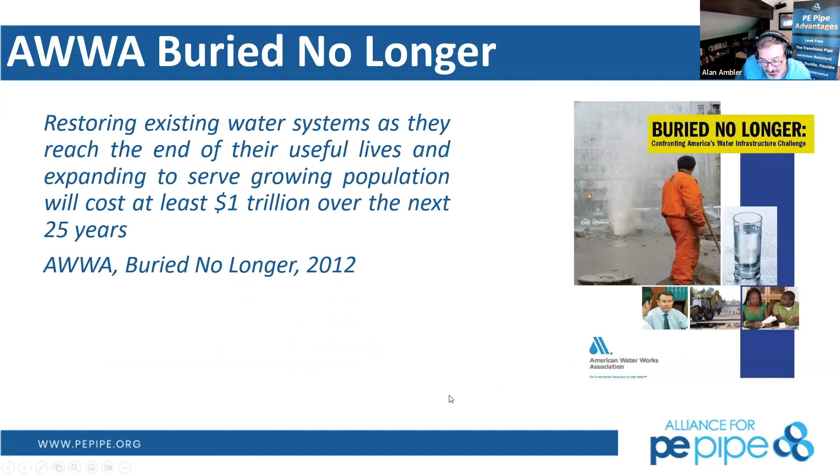Who's up first, Steve or Alan? I believe I am. Here we go - we'll go right into exactly how to integrate HDPE into your water system.

I'd like to spend just a couple of minutes at the beginning - what exactly is a water system, and then what conditions do those municipalities out there face? AWWA, ASCE, all of these agencies have published summaries essentially of the condition of the infrastructure. Quite a bit of infrastructure was built after the Second World War during suburbanization of America as everything pushed out. We're taking a look at exactly what the scope of the problem is in buried infrastructure and how much work we have to do.

So recently, buried infrastructure indicates that we'll have $1 trillion over the next 25 years that'll have to be spent to be able to keep up and repair that infrastructure. It is costly.

Essentially, we're looking to technology to be able to bridge some of that gap. That was a separate EPA study. And we're not installing pipe the way that we used to, which is why high-density polyethylene continues to be a sought-after material of choice, installed through trenchless technology methods or other new unique methods.

ASCE has a similar report card here. Those of you with kids in the audience, if your kid came home with a C- or a D on the report card, we'd want immediate change. Same thing here with the infrastructure. Let's get some change. The good news is it has been inching up. The last time this report card came through, over a decade ago, infrastructure for buried water mains was a solid D. Now it looks like it's a C-.

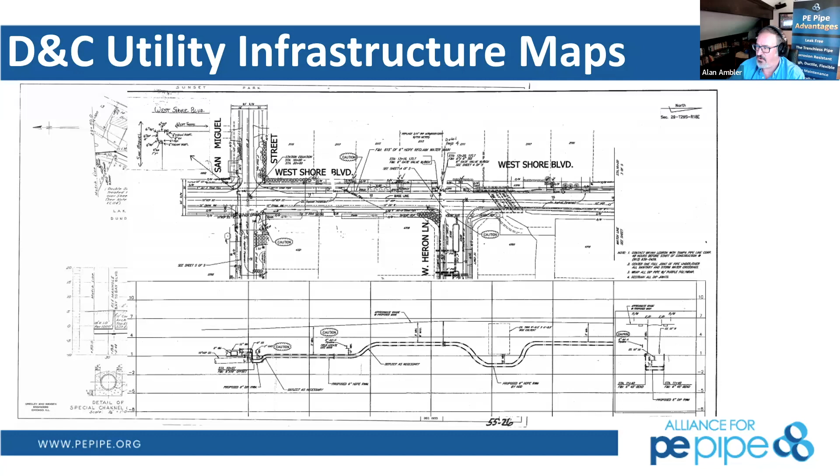That way the D&C operator can be out in the middle of the night with a tablet or something like that to pull up exactly where that pipeline infrastructure is. These give us all sorts of information about profile, if we're lucky, changes in direction, changes in vertical, and all sorts of other things. It continues to grow and be a benefit when we overlay those into aerial maps, and we can make the direct correlation with above-ground features, which makes it easier to locate at that particular moment.

Distribution system quality—and I'm sorry for the bottom right video for anybody eating at this time. That's a potable water system with a bituminous liner failure. There's flow within the pipe, and that bituminous liner is just coming off and floating in that flow. So we do purge poor water through flushing, either unidirectional flushing, a focused direction where we change and control valves and flow to purge contaminants out of the distribution system, or debris and other things of that nature, which you'll see in the middle photograph.

Metallic pipes do corrode, and they will form a tubercle, which you'll see in the top right photograph. Basically, that corrosion is unuseful, non-structural metallic material that comes off the pipe wall and allows space behind it for other things to corrode as well. One of the main reasons why we maintain a disinfection or chlorine residual within a system is so that at the farthest extents of the pipe networks, we still have chlorine that can disinfect or neutralize anything that may be contained within the potable water system.

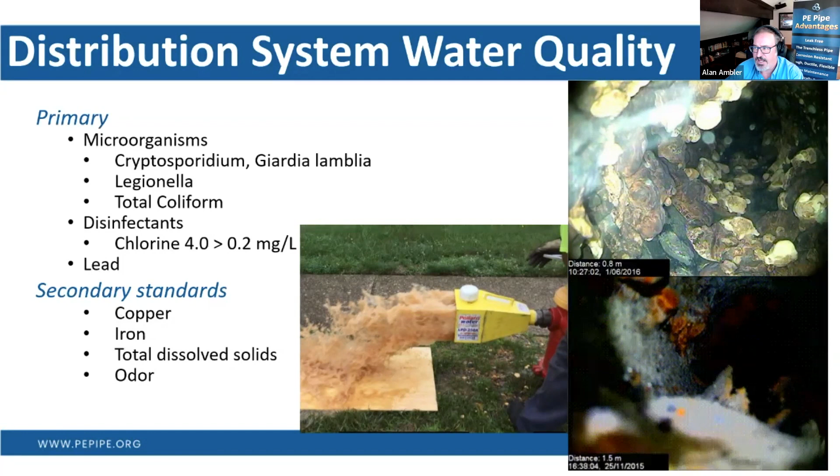These pipe networks are rather complicated, with lots of parts and pieces—storage tanks to make sure we have enough water for major events such as firefighting events, or in the event of a very large break. Obviously there's still going to be water in systems, so we make sure the volume of water we have is suitable for the system we're looking at. Pumps can be variable speed drive pumps that maintain similar pressures as a pressure tank, or elevated pressure tank, to make sure we're providing continuous pressure.

Valves, fire hydrants, mainline pipes, all the various parts and pieces that are necessary to distribute the water from the main source after it's been treated, all the way to everybody's tap. So there's lots of different things that as a municipality you have to consider, especially when you're trying to adopt a new pipe product.

Is it highly likely or possible that an established system such as the one we've talked about and analyzed in ASCE's and AWWA's Buried No Longer can be 100% polyethylene? That's a very long journey, but we appreciate that you're taking the first step about learning about polyethylene and how to integrate it by attending this webinar.

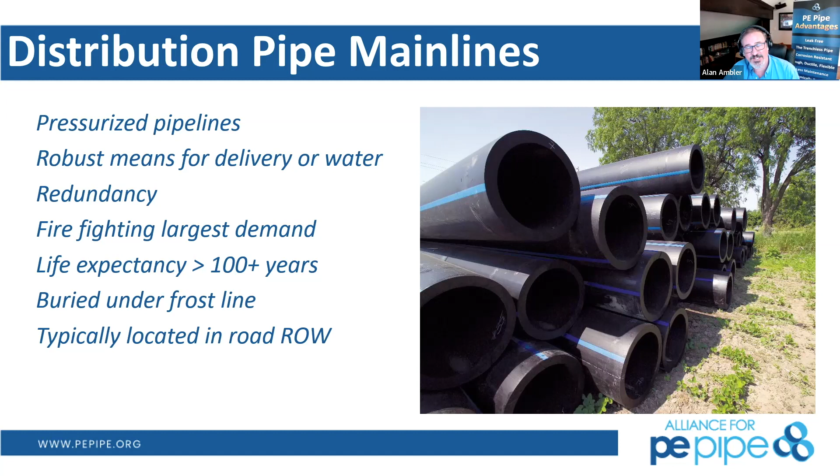So distribution pipe does fail. Sometimes HDPE doesn't have those corrosion issues that lead to leaks. Those things sometimes can in other pipes, as that failure continues, it could lead to a much larger collapse, which has a much greater impact, similar to what we'd see in this animated GIF. By employing HDPE as a leak-free system, we're going to solve some of those problems with leaks that eventually lead to larger failures.

For your main lines, open cut construction is a way to replace existing pipe or install new pipe. The AWWA M55 manual has a design window, essentially for pipes DR7 through DR21. If you have greater than 3 feet of cover for H20 loading, 2 feet of cover for non-vehicle loading, and less than 25 feet of depth, you don't have to do any calculations whatsoever for that.

What you're seeing here, and I show this video a lot, is installing high-density polyethylene, which is considered a flexible pipe. Ductile iron and cast iron are also considered flexible pipes when it comes to pipe installation. We want to make sure that the pipe stiffness works with the soil stiffness to distribute the load — any earth load, live loading, or surcharge loading on top of that pipe — to the soil surrounding that pipe.

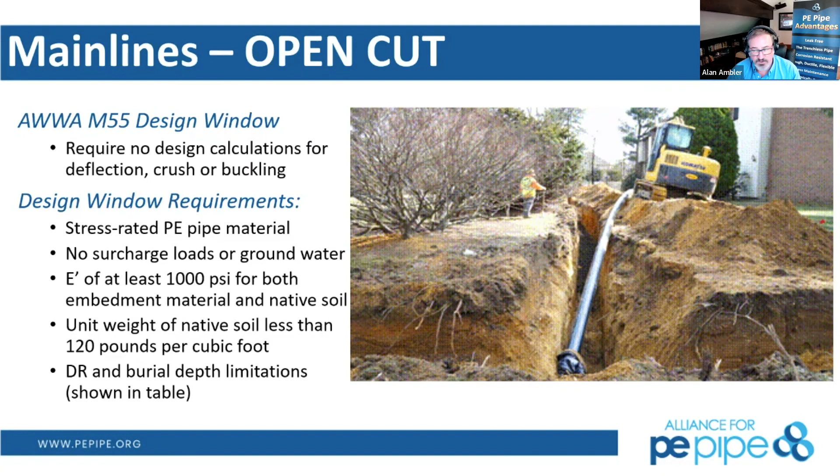For horizontal directional drill, this is kind of the gateway drug for municipalities that haven't used polyethylene previously — an introduction to polyethylene. There's a brilliant engineer who said, well heck, if we're using it for the really tough stuff, why don't we use it for everything? That's pretty smart, Louis Hamel. Definitely recommend using high-density polyethylene in that manner.

So what we're trying to look for as designers for horizontal directional drill is to make sure that the entrance and exit angles are within the appropriate limits set by the equipment, not by the pipe. The drill string is oftentimes less flexible than the high-density polyethylene. We'll watch the friction forces as we get down to the proper curve going underneath something, and then the friction force on the other side of the curve where we're coming up. We want to make sure that does not surpass the tensile strength of high-density polyethylene.

If you're interested, the Alliance does have spreadsheets for both open cut construction and horizontal directional drill, in case you want to work with us to evaluate your project. That's certainly meriting an email to myself or Dan Landy, dlandy@pepipe.org, if you'd like to see those.

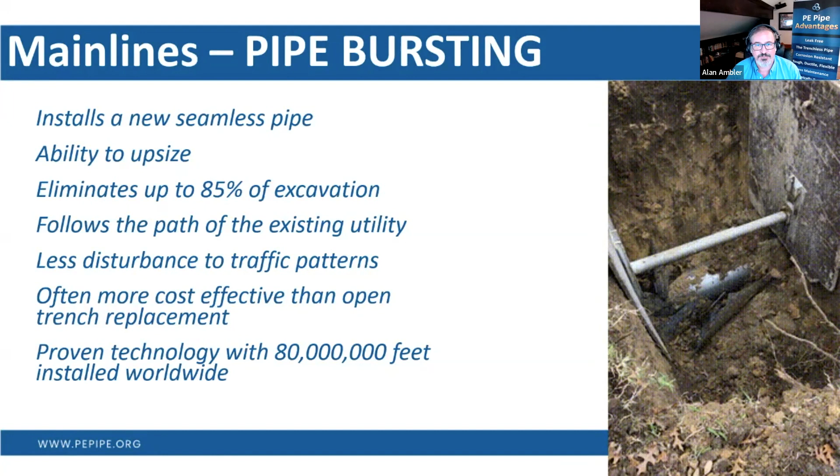At some point in time, the Alliance will offer a full-blown pipe bursting webinar where you can learn more about it. We might have a video or two about that on the website as well. So it's a very proven technology, eliminates quite a bit of restoration, as it's 85% less excavation. And in suburban and urban environments, that restoration can cost a pretty penny, so anything you can do to reduce that's going to be much better.

Slip lining. Similar process and setup as we would for pipe bursting. The only difference is we are not fracturing that existing pipeline. So this is perfect for pre-stressed concrete cylinder pipe or other reinforced concrete pipes that simply cannot be burst. Large diameters, when we take advantage of the fact that we're fusing long runs in advance. In transmission mains, there's separation between valve-to-valve spacing that is much farther than in distribution mains, and we could probably get a significantly higher amount of productivity into place.

We want to make sure that the interior diameter of that existing pipeline is properly prepared, so we're not pulling this replacement high-density polyethylene against some type of obstruction that'll stop the advance of what you're doing. So if you've got one of those pesky metallic pipes, then we'll have to scrape the inside of that to remove all the tuberculation you saw before, and make sure that exits the pipe prior to pulling in for slip lining here.

There's a really cool technology called compressive fit slip lining. It only uses high density polyethylene, similar to pneumatic pipe bursting, which also only uses high density polyethylene. We'll take that OD of an HDPE pipe, put it through a die or series of rollers, and make it smaller. Now, of course, that pipe pulls and stretches. The behavior of high-density polyethylene that allows this process is called viscoelastic behavior.

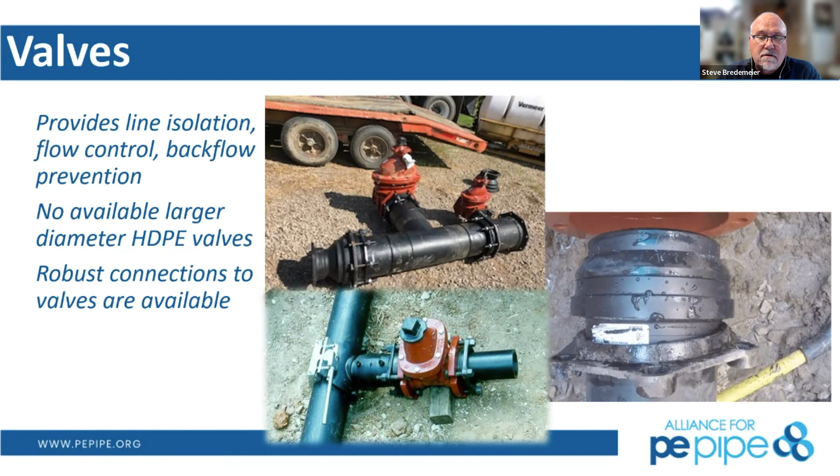So this MJ adapter is fused onto the end of the pipe, and it is drawn into the valve to make the joint. Next slide, let's look at a little better detail of that.

So, since the 90s when we started adapting to these, because our spec came out in the early 90s, AWWA C906, the MJ adapter was the way to go. It was the way to connect to existing infrastructure and existing waterworks products.

Since then there's been a lot of innovation. One of the great innovations is this hydraulically pressed on HDPE onto the end of the valve. They made the end of the valve a barbed fitting, and it's hydraulically pressed onto the end of the valve, and then a follower ring, you can see in the right-hand picture, is pressed over that, so it creates a fully restrained joint. This same valve technology, the internal workings work the same as an MJ valve. It just has a different end adapted specifically for HDPE pipe, and those ends can come in different DR ratings. Typically it's DR11 for the water industry, but that's a great innovation that came about in the last 5 or 10 years.

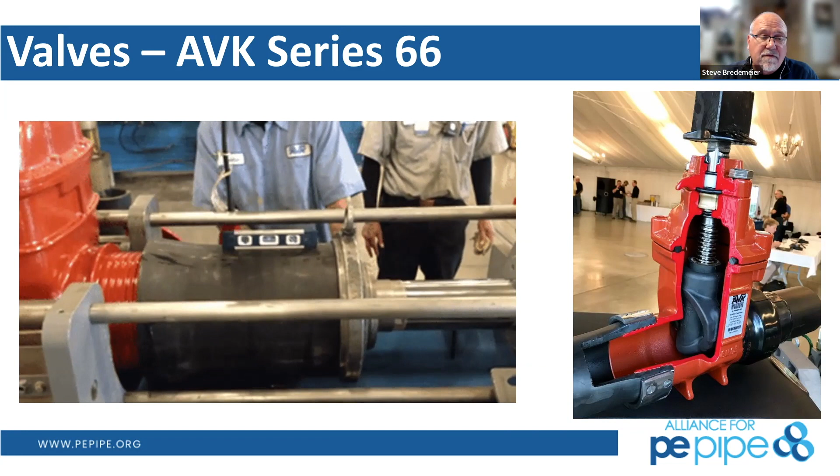And there are other manufacturers that have the same technology, made specific for HDPE. We have a limit to the size they're doing those in our industry.

Another innovation that's happened over the years is the ball valves that came from the gas industry, because they use ball valves throughout the gas distribution industry, and they were kind of our guinea pig back in the 80s. Then in the 90s our industry adapted them to the water industry, getting all our AWWA and NSF certifications to use in potable water systems. Today there are even ball valves that come in up to 16-inch, but a lot of manufacturers go all the way up to 12-inch. These ball valves are made of HDPE, so you eliminate the bolts and the corrosion opportunities, and you get a full flow. It's a great option when you're integrating HDPE into your water system.

So the ball valves are yet another option.

The one thing in the water industry that everyone actually sees is a fire hydrant. I like to tell people it's the only thing we sell that you get to see. That's our access to water to fight fires, for one, but water systems and water departments also use them all the time to flush and clean their lines.

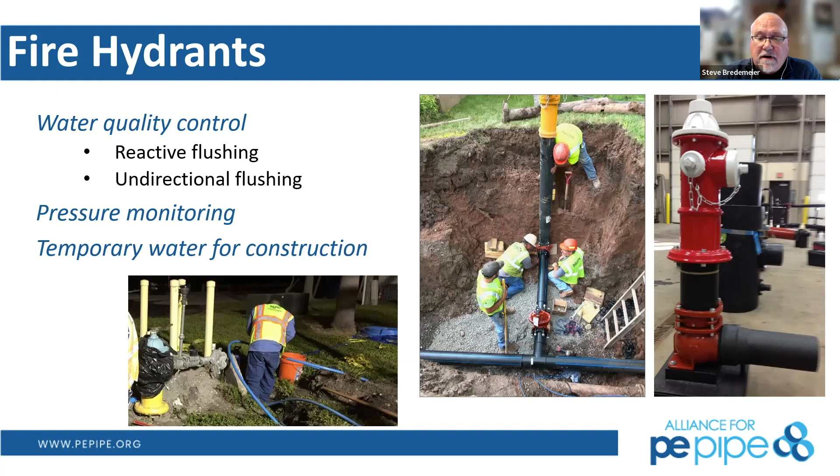Service connections, obviously, are why you're putting a water system in the first place. There are all kinds of different size services. If you're going into a commercial building like a Walmart, it might be, let's say, a 6-inch service lead that goes to the large commercial building.

This gentleman is tapping—I'm assuming that's not a live main, since he's not going through a tap machine or a valve. He's actually coring a hole in the side of the pipe. That electrofusion saddle for that 6-inch service saddle was electrofused onto the side of the pipe, and now that it's done cooling, he's core drilling that hole. This way you can avoid putting an actual T fitting in the middle of the line—you can add it later. He's got an MJ adapter on there, so after he's done coring, he'll bolt on an MJ gate valve to provide isolation for that commercial service line. Steve, I can confirm that was not a live line.

This is a unique scenario up in Duluth, Minnesota, where they have a larger service line going into a bigger building in the basement. That fitting there is inserted to make sure the HDPE stays centered going into the basement of the building. Yep, he'd get a whole lot of water on him if that was live.

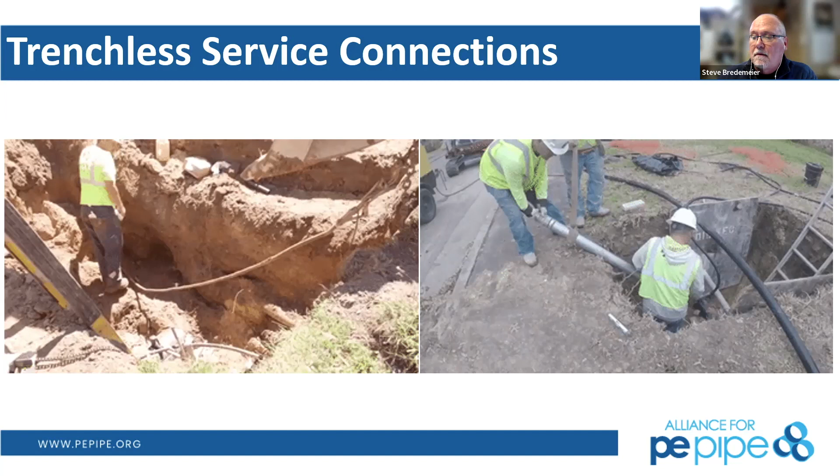There's a corp stop threaded into an HDPE service saddle. This is an electrofusion saddle, different from a mechanical saddle used on other piping products like PVC, which sometimes have a gasket. The service saddle on the left is fused onto the outside of the pipe, giving you a leak-free fusion joint on the water main. Then you thread the corporation stop, the brass fitting, which is used to tap through. You can do a live tap with the corp stop by attaching a tap machine, opening the valve, coring through the main, and hooking up your service lateral.

An item we've used for probably 40 years in the gas industry is on your right, an electrofusion tapping tee. The tapper is built into it under that cap, with a stainless steel cutter that cuts down through the top of the pipe after it's electrofused onto the pipe. He's hooking up the service lateral before that with a small butt fusion machine, actually fusing the pipe to the outlet of that tapping tee. That allows a leak-free system, and you can avoid using legacy products like mechanical brass couplings or that corp stop.

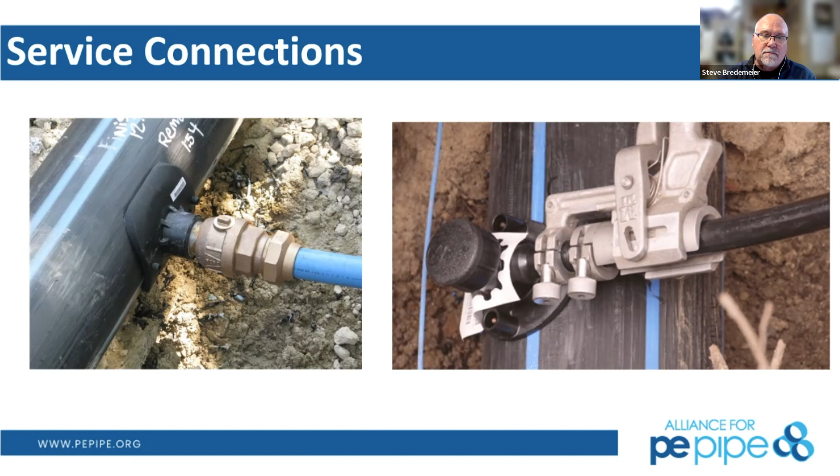We're going to turn it right back over to Steve with 6 E's. I think it's important to realize, on the restraint question and the DOT question, that usually the reason DOT resists using polyethylene is from one bad experience where somebody forgot to restrain the end of a road crossing, didn't use an MJ adapter to restrain the transition back to another product. They had that one bad memory where it was really a contractor install issue, not an HDPE pipe issue. It was somebody not knowing they needed to restrain the ends of that road crossing, or not having the right standard detail showing them how to restrain to other piping products that are restrained differently.

I forget this gentleman's name, but I'm told I believe Peter Dante mentioned, yeah, Dante. Peter has confirmed that he's all right, that he survived this event.

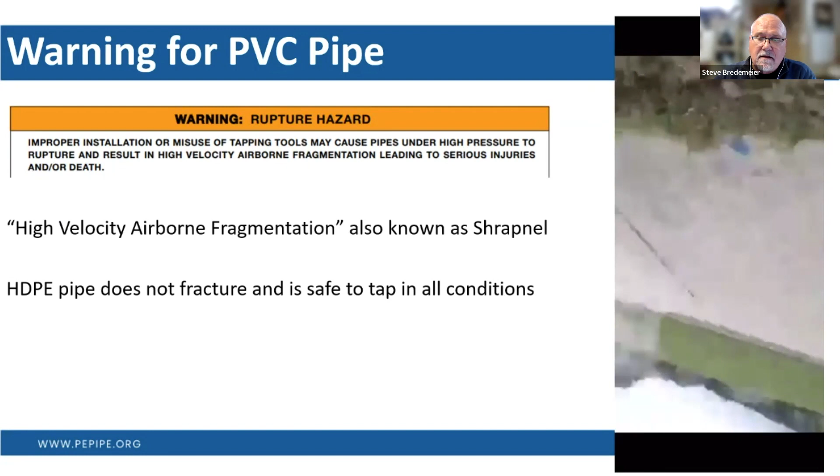But this will not happen with HDPE. It does not fracture catastrophically like PVC will do. PVC generally won't do that, but if you don't have your drill bit properly sharpened, it can fragment like this. Polyethylene resin is much more malleable than PVC and will not fracture in this way. Anybody who's installed PVC pipe before knows they've had that experience because their tap bit wasn't sharp enough, and that just flat out will not happen with HDPE because of its flexibility.

So what makes HDPE really different from other water products or piping products in the waterworks industry is that we join our pipe not with gaskets but with fusion, and one of those types of fusion is electrofusion. All fusion is heat, pressure, and time.

The electrofusion gets its source of heat from heat resistance wires built into the fittings. Its pressure comes from cold zones on either side of the wires that are built into the profiles of a coupling.

The tapping saddle on the right has the wires on the inside radius of the saddle. The cold zones prevent escape when the molten material heats up and expands. It dams up in the cold zones and builds pressure, and that pressure buildup makes the molecules from the outside of the pipe mix with the molecules melted from the inside of the coupling.

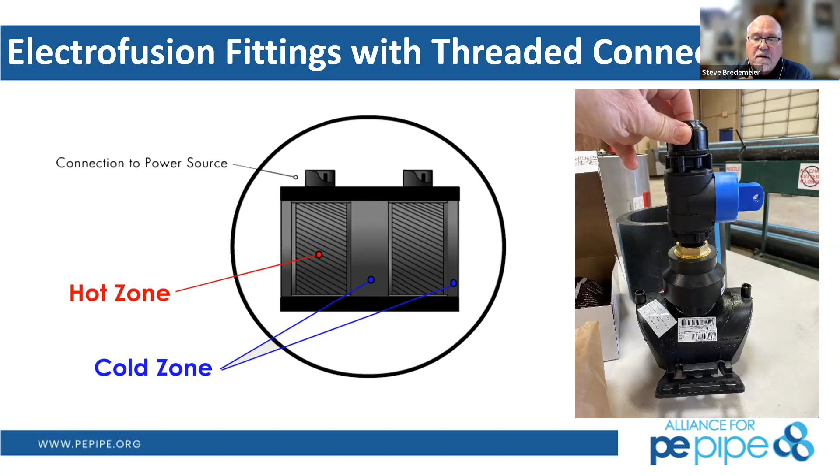There's a certain time the electrofusion process takes, and it's all programmed into the electrofusion processor, which knows how long to cook that fitting, so to speak, for the correct amount of time. Once the process is complete and the heat stops, the cool down process happens for a certain amount of time. But once that's done, that fusion joint is stronger than the pipe itself, and it's a 100% leak-free connection.

So electrofusion comes in all sorts of forms. The most common are the tapping saddles you see there, or the coupling you see on the left.

Again, you've eliminated the corporation stop, the brass fitting, which, a 1-inch corporation stop is over $100, and that's just the valve, used only one time for the hot tap. These electrofusion tapping tees are closer to $30, and you don't have the cost of a mechanical saddle, so it's a much more economical way to do a service tap for a water department than doing it with mechanical fittings.

Because our industry has evolved so much over the years, a municipal advisory board was formed, made up of municipalities that had adopted HDPE over the years. It's a group of multiple municipalities from all over the United States. One in my area—I live in Ohio. One member is from Fort Wayne, Indiana, a real big advocate of HDPE, who was on this advisory board. So they all got together and came up with a generic procedure for water departments specifically, including generic procedures for doing electrofusion.

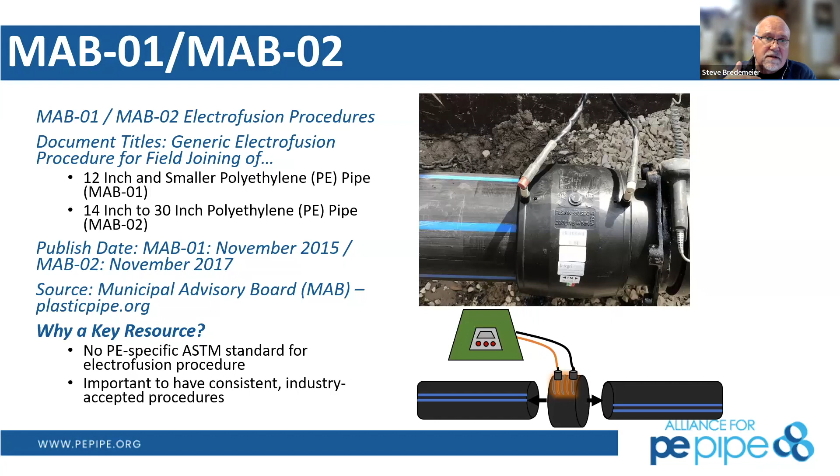So now you're no longer necessarily reliant on the individual manufacturers of HDPE electrofusion fittings. They have all these different suggestions on the PPI and PE Alliance's website, where procedures are already written for you, and they're there to share for the municipalities you're advising.

This goes through the process of how you do electrofusion procedurally, and it jives with all the manufacturers of electrofusion products. You clean the pipe, mark it so you know where to scrape it, and use a pipe peeler to peel off the oxidative layer on the outside of the pipe, because you don't want any contamination within the fusion zone. It's very important to clean the pipe, scrape it properly, and then mark it so you can center the coupling over the joint between the two pipes.

The heat is applied by the electrofusion processor after you've clamped it to make sure you've got proper alignment, and the fusion process begins. The heat melts the inside of the coupling and the outside of the pipe, the pressure builds, the molecules mix, and electrofusion is made. Again, it's stronger than the pipe itself.

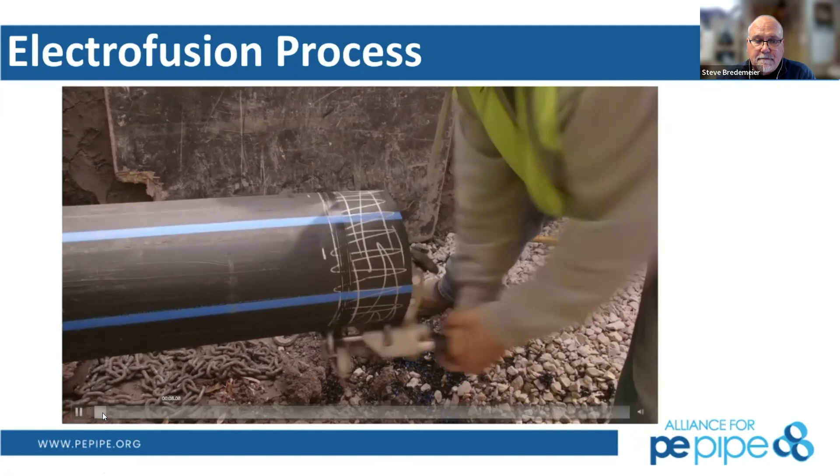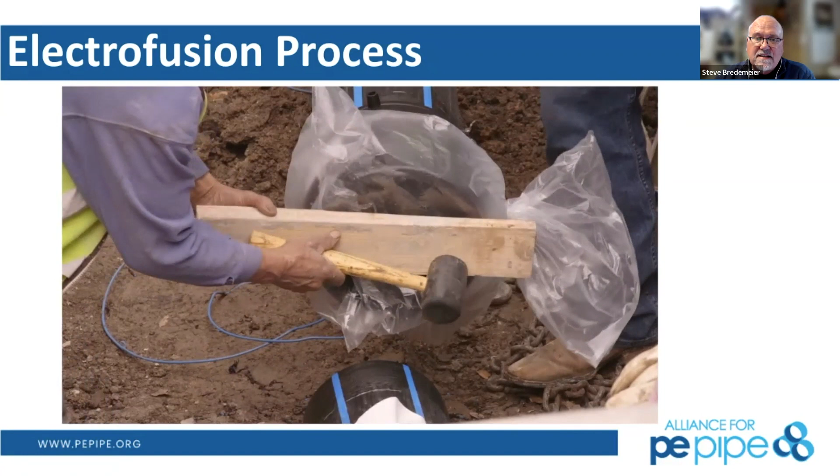Here's a live version of that. See how the color changed—how the milky white look on the outside of the pipe disappeared once it was scraped. It became really shiny, down to virgin resin. There's no oxidative layer on the outside of the pipe now that it's been peeled.

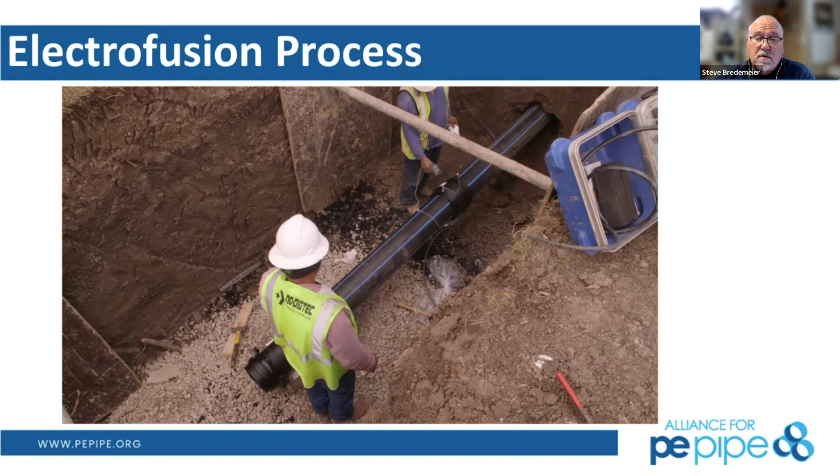They leave the bag on the coupling to keep dirt or other contaminants from getting in. See the line he's marked, so he knows it's centered. He plugs in the electrofusion processor, which will do any coupling of any brand—they share barcodes. He scans the barcode, and that's a 279 second burn, so it's going to heat those coils up for 279 seconds for that particular size coupling.

So that's electrofusion, and that really does make HDPE unique compared to other municipal water piping products.

They do make service lines with some tracer wires we're seeing here. Plastic pipe, of course, does not carry an electrical conduit or conductivity, so we do need to try to put tracer wires, RFID ball, which actually sends a signal to the surface to locate it. These are just some methods to properly locate this when trying to figure out where it is to make a repair in the field.

Here's more service connections. It's an interesting thing about that tracer wire is it is also coated in HDPE. So if you're specifying tracer wire, you want to make sure you do it for buried use, and all the buried use tracer wire brands have an HDPE coating, which protects the tracer wire just like it protects your pipe from corrosion.

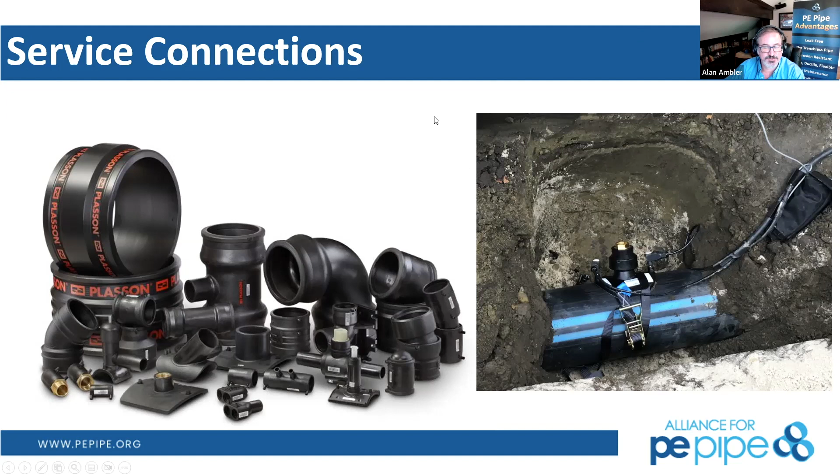We are moving a little bit behind, so I'm going to speed through some of these next ones. These slides will show you that HDPE has just about any option for you to integrate into your water system. This is a pipe display that we carry with us and reassemble at each location, showing just how many different ways we can put this high-density polyethylene together in your system.

Some of those old arguments that you can't use this fitting or that fitting or the other one - there's always a fitting that Steve has right there in Ohio and Core & Main and all the states that he has, and can deliver right to you.

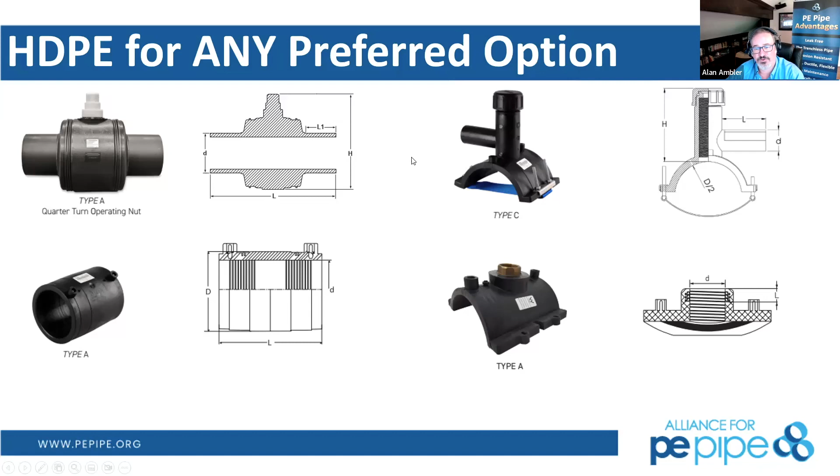So here's some more cut sheets. They do have shop drawing submittals that they'll send with all the information to be able to adopt into your system. It'll tell you the exact details, just in case you're interested, as to how big that fitting is, what the dimensions are, and also for IPS, iron pipe size, or DIPS, ductile iron pipe size, as we go through.

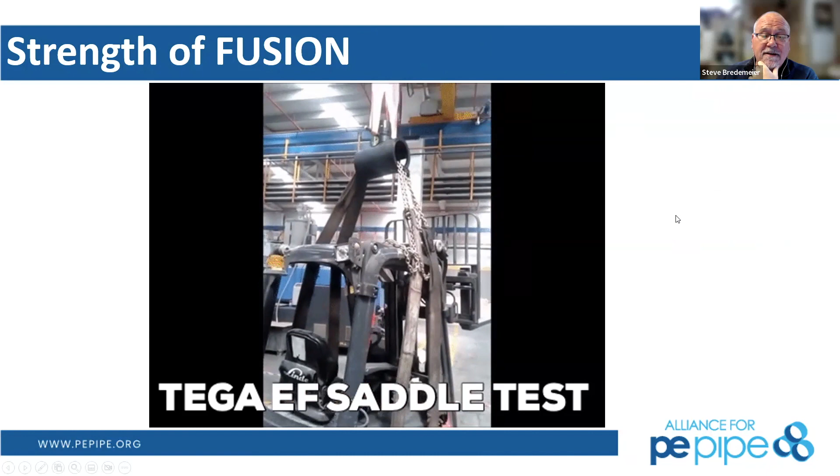This shows the strength of that fusion. They fused an electrofusion fitting right onto a polyethylene pipe, and now we are lifting it with a forklift and a crane system in a manufacturing facility - probably not in the United States, but I don't think that matters.

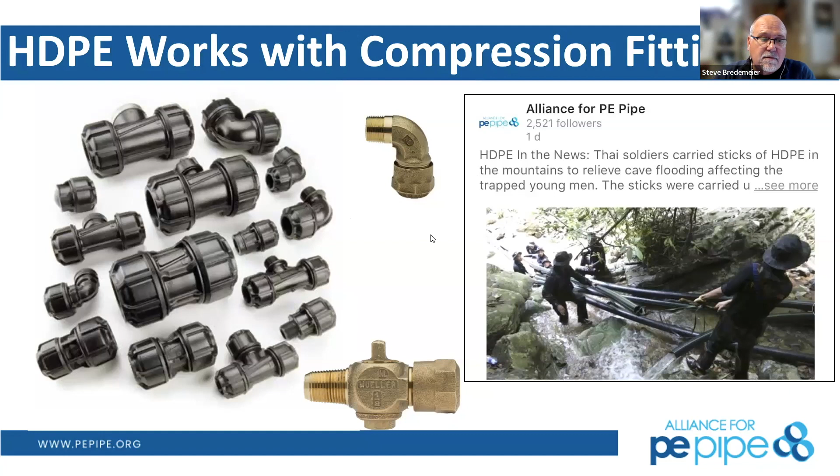They're sealed by an O-ring, and so when the pressure is put on the pipe, that O-ring expands into the exterior wall of the pipe. The higher the pressure, the more that O-ring is forced in there. So the more legacy compression fittings made of brass do need a stiffener, but the newer polypropylene plastic compression fittings do not need a stainless steel stiffener because there is no exterior compression force placed on the pipe.

Of course, our industry, because our pipes are longer and they come in coils, there's material handling suggestions from PPI, the industry trade group, with manuals on how to handle the pipe safely, available throughout PPI's website - we can get you those as well.

I think the next slide is a way not to unload the pipe, but our pipe is so durable that people do unload it this way. This is at a gravel quarry, and they use our pipe for sand slurries at sand and gravel mines.

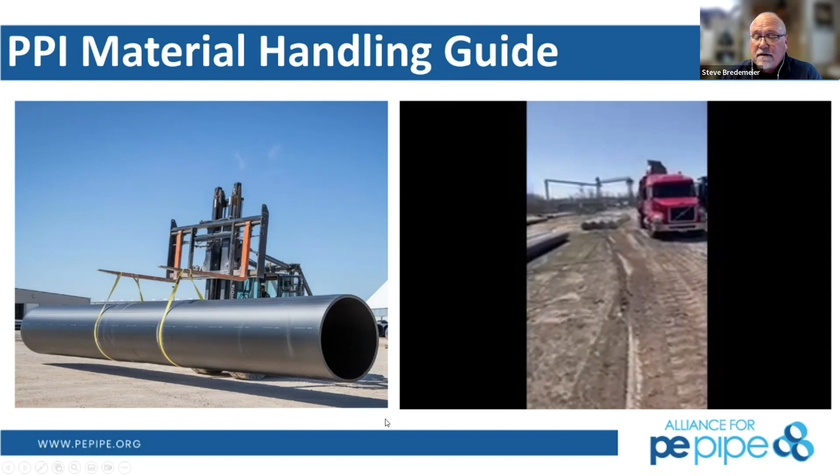They've been using our pipe for years because the abrasion resistance is so much better than steel—it's 4 times that of steel. But because of its durability, they feel like they can treat it this way. Now the pipe doesn't break and the pipe is absolutely fine, but that is not a safe way to unload HDPE pipe.

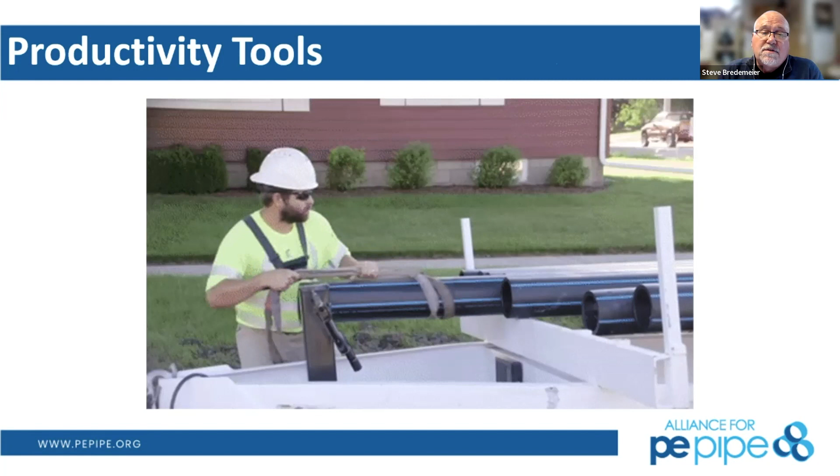Here is the way you should be doing it. This is not only a better way to handle the pipe, but it's also more productive when you set up your 40-foot lengths, or these might be 50s, to set them in your butt fusion machine to fuse the pipe with McElroy equipment.

Our fusion machines get up to very large sizes. This is a T900—it's remote controlled. T900, that's 900 millimeters, so it goes up to 36-inch pipe. There are even larger fusion machines, but these are some of the innovations that have happened in the pipe industry over the years as we've gotten to larger and larger pipes.

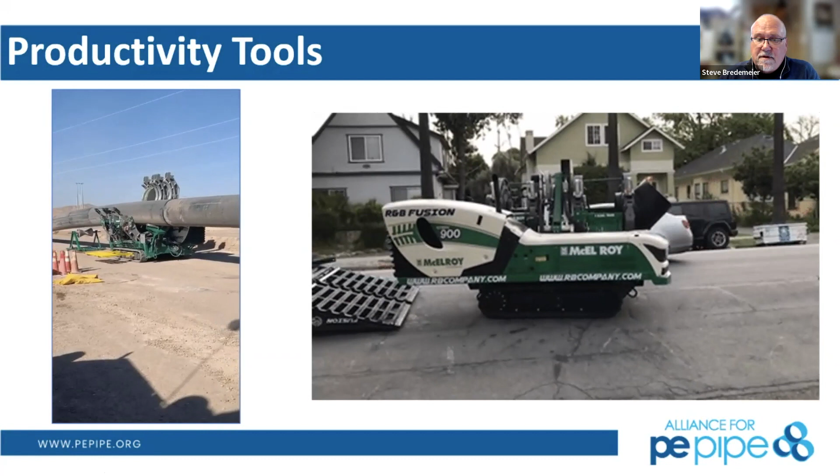McElroy is the leader in fusion equipment and one of the founders of this organization, and they have just developed new and innovative productivity features into their fusion equipment over the years.

Absolutely, Steve. One of the best things I've seen is just this sheer amount of innovation that happens in this industry to make things easier. Every time I put my hand on a McElroy machine, I get to a point where I think, oh, it should do that—and then they say, no, it does that. It's right there, that's it.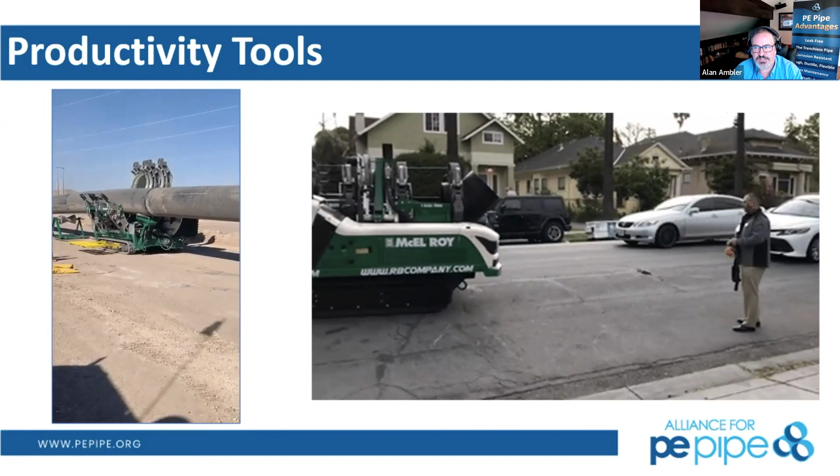We just had a really good question from Dan Sirkin, and Peter probably will come on too to help answer this—it's a rather complicated one, and we've got some of the right people here to try to talk through it. Sometimes municipalities are used to doing and installing other pipe material types, and they have the equipment to do it. They don't have high density polyethylene equipment such as fusion machines or electrofusion machines, and there's a learning curve. So how is it that we encourage some of those municipalities to switch and embrace HDPE, to teach them, how do we get them over that line? Dan, I think one of the reasons why we pulled focus on your question is part of the reason why Peter, Steve, and I have jobs. So here it is—would you guys like to elaborate on some of this?

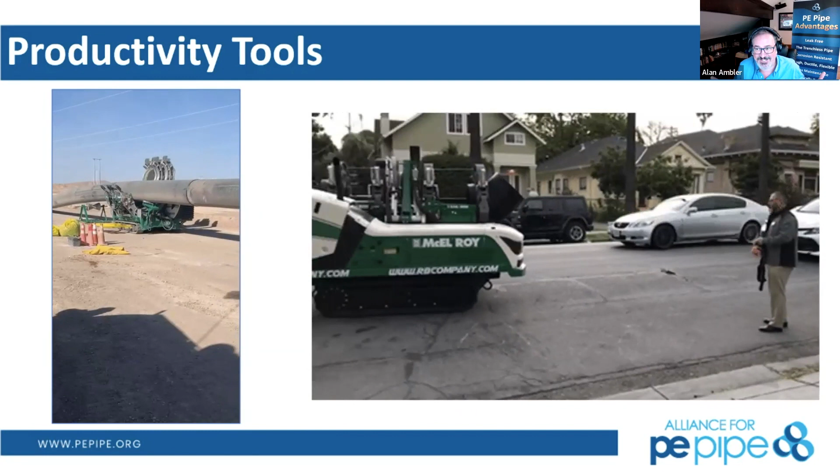I'll give it a shot real quick. I had the same question yesterday, so that's why I'm bringing this up. I did a lunch and learn at an engineering firm yesterday, there were 15 people there, and somebody had the exact same question. What we see happening is you get a whole different group of contractors bidding a polyethylene job. The contractors out there installing gas pipe right now have all the experience on fusion, own the equipment, have been doing it for 30 or 40 years, but they're working for the gas company. So a lot of times you'll see a different crowd of contractors bid a polyethylene force main job, for instance. That's one way I've seen—when somebody specifies HDPE, they get a different set of contractors that bid it, the people that already own the equipment, the people that have the experience. Because if you can lay gas pipe, you can lay water pipe.

Dan, we hear this question all the time, or statement as to why the adoption—polyethylene only has a 15% market share in North America, whereas PVC is like 50% and ductile has the rest. 30 years ago, 66% of the pipe going in the ground was metal pipe. Today, 66% is plastic pipe, whether it's PVC or polyethylene.

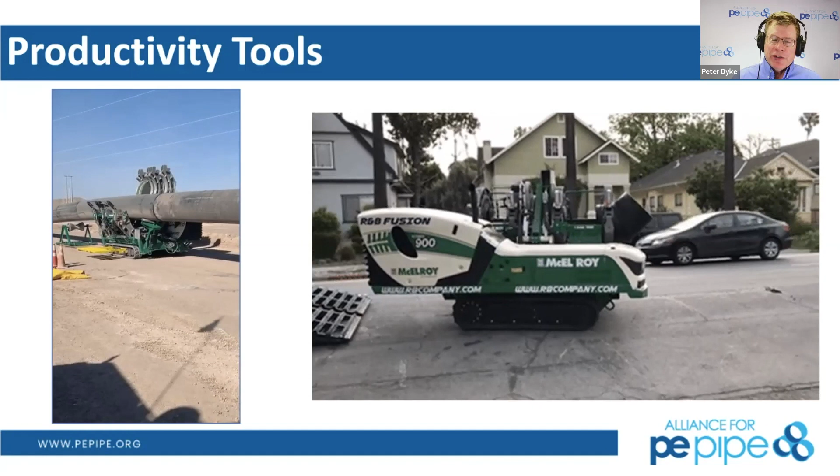I served on a board for 10 years in a town, and if my chief engineer came to me and said, I don't want to use a better product because I don't want to teach my guys how to do it, I would get a new chief engineer. Or I would be concerned about my organization's ability or interest in solving for the failure mechanisms we all see every day. There's a reason Houston is very worried about their concrete pipes—their large diameter concrete pipes are all at the end of their life now, and they're starting to fail on a more regular basis.

But Dan, I look at it more like there's a certain population of municipalities and consulting civils that are willing to accept intellectual arguments about our selling proposition. Our selling proposition is that we solve for the failure mechanisms of other materials.

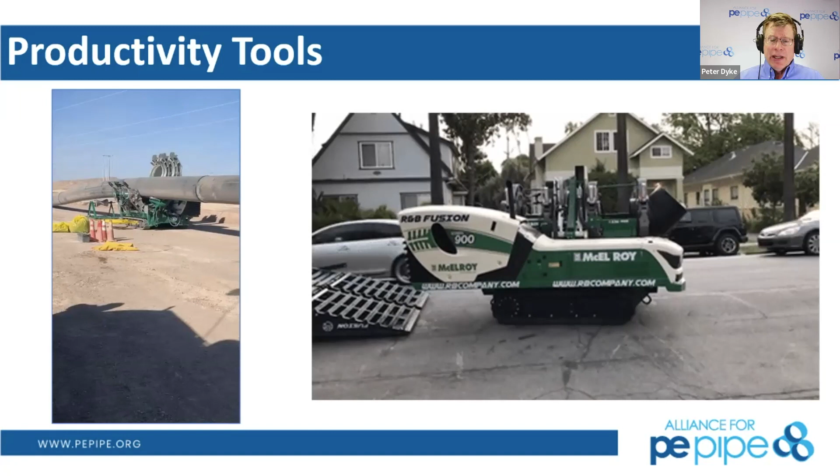And if there's a utility that doesn't want to use it because they don't want to train up their staff and learn something new, fine, I'll move on to the next one, because we're moving up and to the right really very quickly. We're selling more and more pipe every year. Last year, we put in 19,000 miles of polyethylene pipe in US and Canadian water utilities.

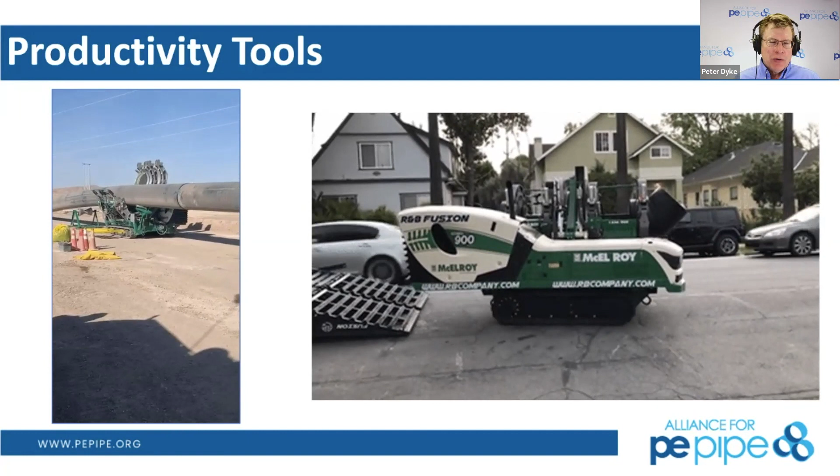So it's a complicated question. There's a lot going on. It goes to the issue of organizational behavior, training, looking at the long horizon of what utilities' maintenance budgets look like and their capital programs. It's a great question, something we face all the time, and I appreciate your asking it.

Back to you, Alan. Let's pick up some time. You did a great job.

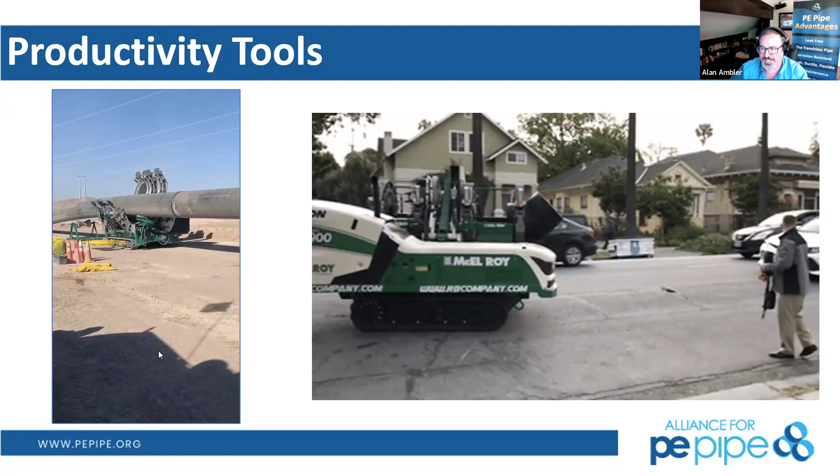Stephen. So part of the reason why we're here is to teach you guys how to fix your infrastructure as well. So we just need to get those projects and stuff going on off the ground. Definitely we're here to do lots of different things.

Inventory yard. A unique thing about high density polyethylene here is the fact that it is UV resistant. The carbon black that we've got, 2% of the resin, is integrated with carbon black, and that makes it so we're diffusing that UV radiation through the wall of the actual pipe itself.

So it does heat up during the day. And for those of you asking about temperature, we'd have a temperature increase and expansion of that material. So we'll be looking at, especially during pressure testing, if that pipe has expanded, it'll take on more allowable water to go through there. That expansion will have to be tracked when we are pressure testing the pipe.

But it is permanently UV resistant, which is great for our inventory yards. So when we're in the inventory yard, that HDPE pipe is never going to degrade in that manner. Obviously, electrofusion fittings you want to keep in the bag in a controlled area. But here we're not going to have a degraded pipe like PVC or gaskets or other things to deal with as we go through.

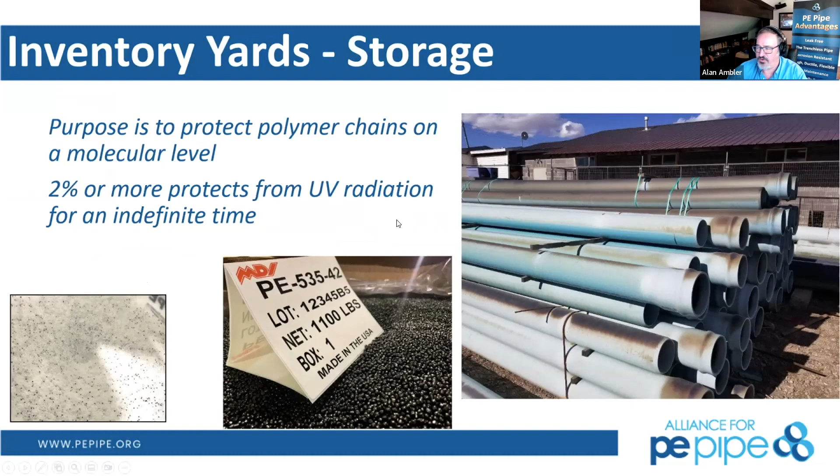So water pipe materials over time—this speaks to some of what Dan was asking as well, and we love the questions, by the way. Your questions make everything better. That's what Dan Landy, Aaron, and Matt Hahn are covering for us.

So the way that we are installing pipe is very different than it was a long time ago, and also very different from when PVC, ductile iron, and HDPE were all invented, which was in the 60s. It just so happens the municipal potable water market isn't as familiar with it, because gas is where quite a bit of high density polyethylene was installed, way more so than potable water in the mix.

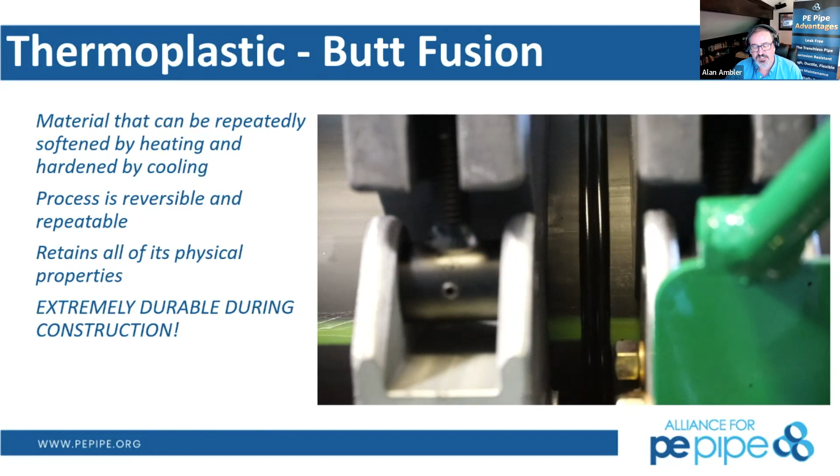But here's basically what this pipe is. We've talked already about thermoplastics a bit. This process of fusion that you're watching makes a bond that's basically stronger than the pipe itself. All we're doing is controlling how this high density polyethylene resin flows on a molecular level. It's very amazing—if we control that environment, it doesn't matter what type of fusion you're doing, it's going to be just like extruding the pipe itself in the manufacturing facility.

So here's the steps to butt fusion: we clean it, shave it, heat it, and fuse it. When you're using butt fusion, that machine will do quite a bit of this for you—all you'll have to do is load it right up there. And as you saw from the productivity tools, one employee can come through and fuse up a very long run in advance, while all of the other workers are out there doing other tasks.

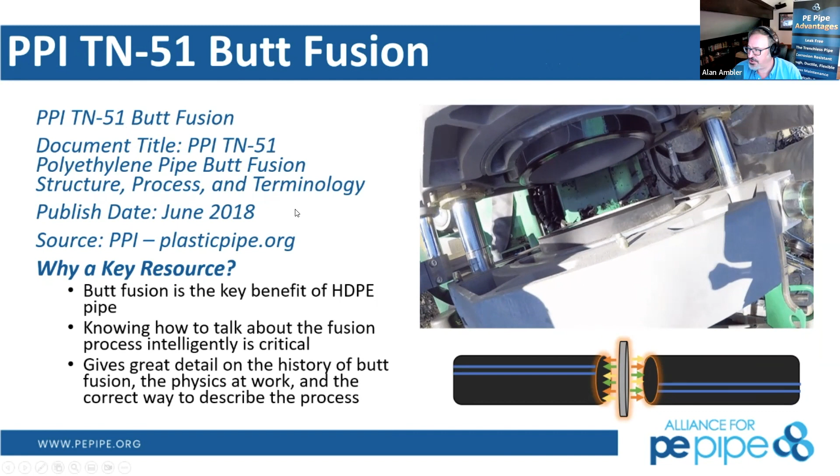They're trying to find third-party utilities, trying to put in service connections, do all sorts of other things, while this particular individual maintains that productivity level as we go through. So there's guidance, technical notes—this is one, technical note 51 for butt fusion. It'll tell you through the whole process, walk you through it, show what could go wrong in different manners and what to look for as we're coming along through this.

The allowable bend radius of high density polyethylene is more forgiving than any other pipe material type, and that's because of the durability and ruggedness we attribute to the viscoelastic behavior of high density polyethylene. So here's just some general information on the allowable bending radius.

When we look towards trenchless technologies, we're not limited by the bend radius of high density polyethylene, but more so by the bend radius of the equipment, such as drill string or quick lock rods in terms of pipe bursting. So it is very forgiving to be able to come through and manipulate this pipe in the field during that installation.

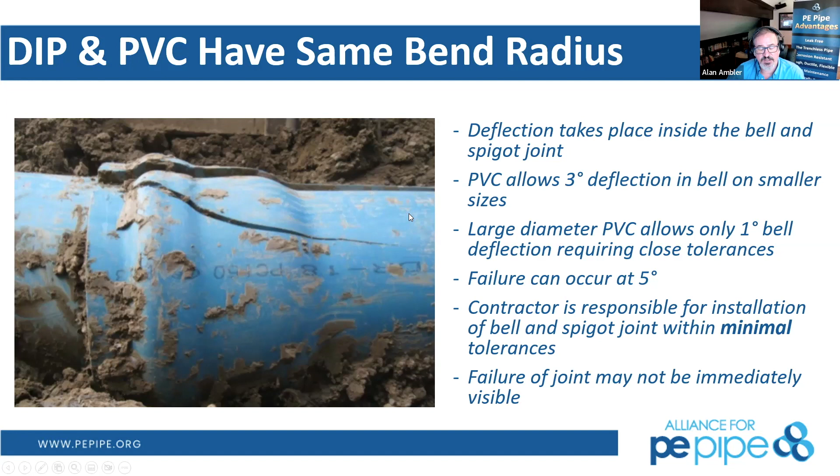DIP and PVC have that same bend radius, but they'll achieve it by deflecting the joint itself. So some of the most common failures upon installation for DIP and PVC are over deflection and over insertion of that bell and spigot pipe, where we'll break it. These can either show up immediately or within the first several years of operation.

When we get to ease of workability, we take a dry chainsaw, an oilless chainsaw, out in the field to be able to cut that pipe. Then you can just re-fuse that pipe right there. You can also use a sawzall, which you'll see in the other picture as well. So it's very easy to work with this pipe in the field and very durable.

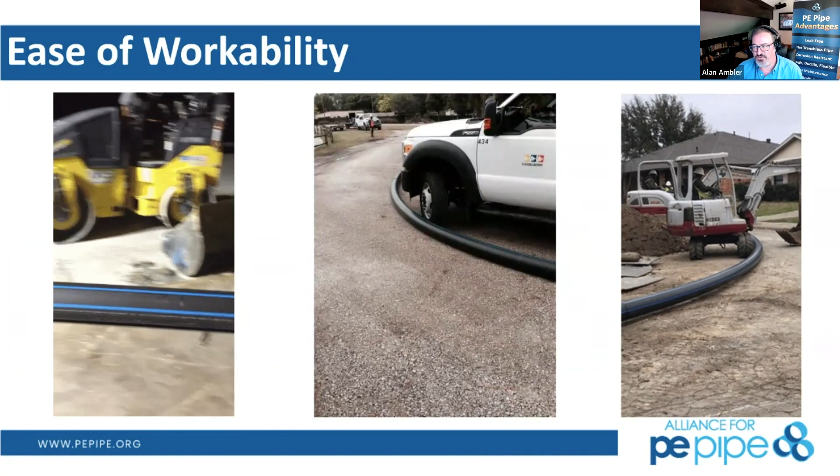When we're moving it from the laydown yard to the actual location, it's very common to just drag it on the surface. This isn't damaging the pipe typically beyond its allowable 10% gouge allowance, but we do, as construction inspectors, want to walk that pipe before insertion once it is at the pipe insertion pit, to see if something along the pipe's journey from the laydown yard to the insertion pit has put in a big gouge. Here's some more information, basically more images on over insertion and proper tapping for us.

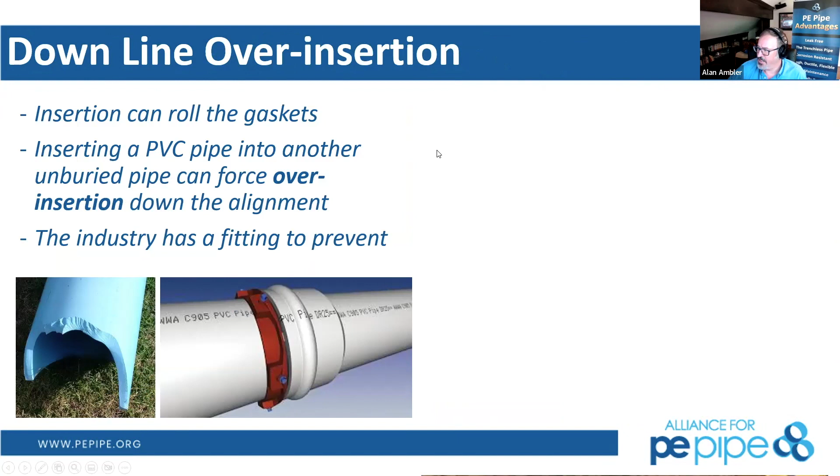Again, we do need to bury that pipe, the bell and spigot pipe, as we go through. In this picture on the right, as they're banging in that pipe, they're further applying stress to the upstream pipes that had already been inserted into their bell and spigot segments as well.

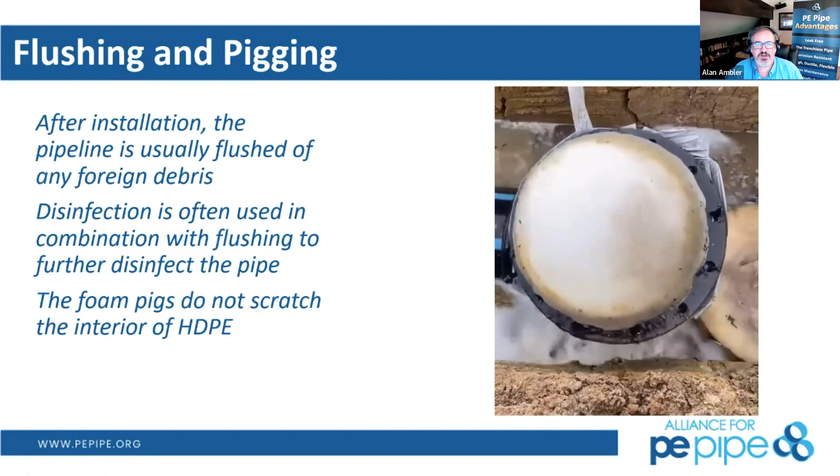Here's a video for flushing and pigging. So after we install, we are going to tie in on one side. We will put a pig and potentially chlorinated water, chlorine tablets or the like, on the opposite side of the pig. Tie into a fire hydrant, open it, and basically flush that pipe out from any debris or contaminant in it. You absolutely want to make sure that if there is superchlorinated water, that we are dechlorinating that water as we're retrieving it.

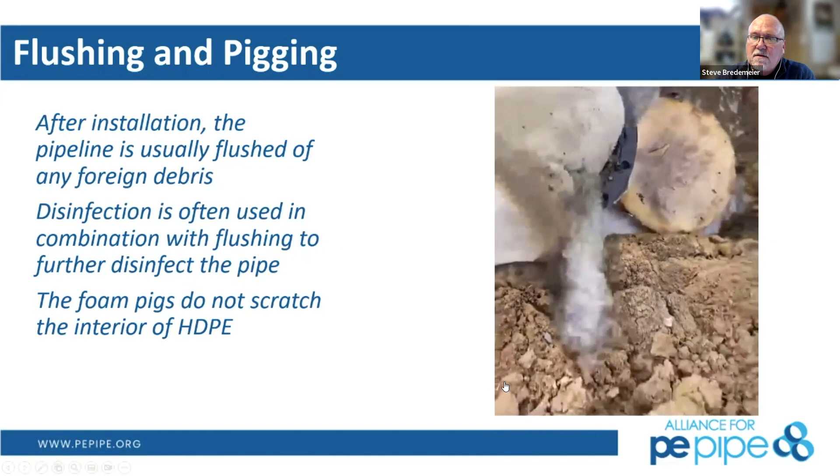Many municipalities already pig their larger lines, and they need to do it because they get so much more dirt in their pipe, they get stone in their pipe, and you don't get enough velocity without a pig to rinse out larger diameter pipes. So this is not unique to polyethylene. A lot of municipalities require pigging before they turn the line over. In our case, it can get any shavings that might still be left in the pipe from the fusion process. None of that hurts the pipe as it comes through. Those foam pigs are simply scraping the inside.

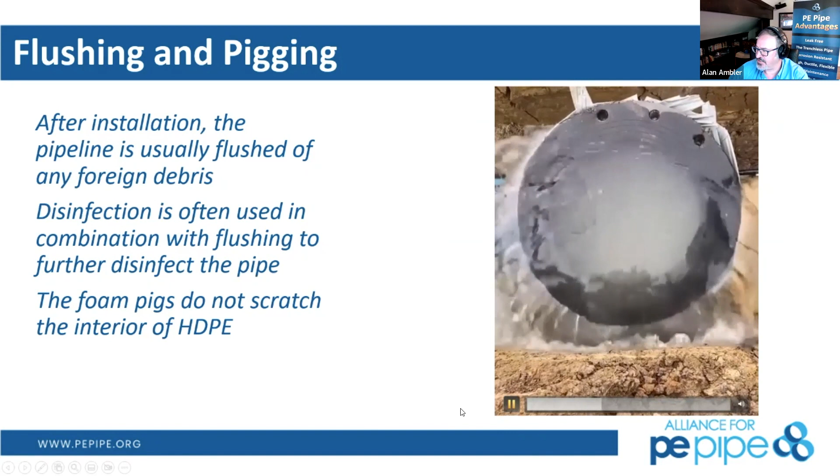Similar process if we're preparing an existing pipeline for rehabilitation via slip lining, we're preparing the inside surface of that pipe itself. So here's a standard on leak testing.

Essentially, ASTM allows us to do that. What's unique to high-density polyethylene itself is the fact that, as I mentioned, it will expand. So polyethylene is a leak-free system, and typically, if it's stable and calibrated and not expanding at that time, you will not add any makeup water to it. That's just one of the unique things we pay attention to during leak testing.

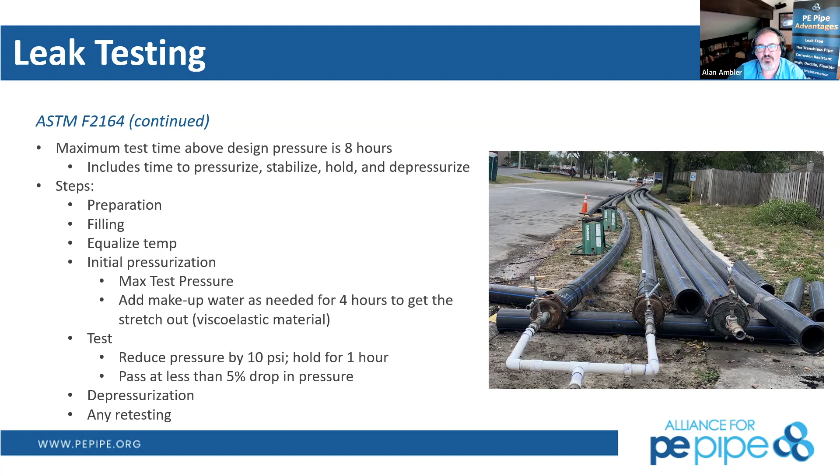What you'll see here is a laydown yard with some pipe strings that have been strung out. We'll also disinfect the pipe while pressure testing it. We make sure that we pressure test for less than 8 hours, which is fairly typical. And again, note that each operating pressure of the municipality may be different from your operating pressure at the pipe, and we want to be respectful of that when doing our pressure tests.

So Steve, you want to talk about in-the-trenches butt fusion? Yeah, back to the innovation that McElroy, the largest and only domestic fusion machine manufacturer, has done over the years. As we've gone to bigger and more complicated projects, they've developed great equipment features that allow you to take that butt fusion machine down into the ditch with extension hoses to do, in this case, very large diameter in-ditch butt fusions.

The one thing about butt fusion, unlike using electrofusion couplings, is one of the pipes has to be able to move. So one of these two pipes is free to move to do the butt fusion. It needs to move about the thickness of that facer, which in that case was about 8 inches thick.

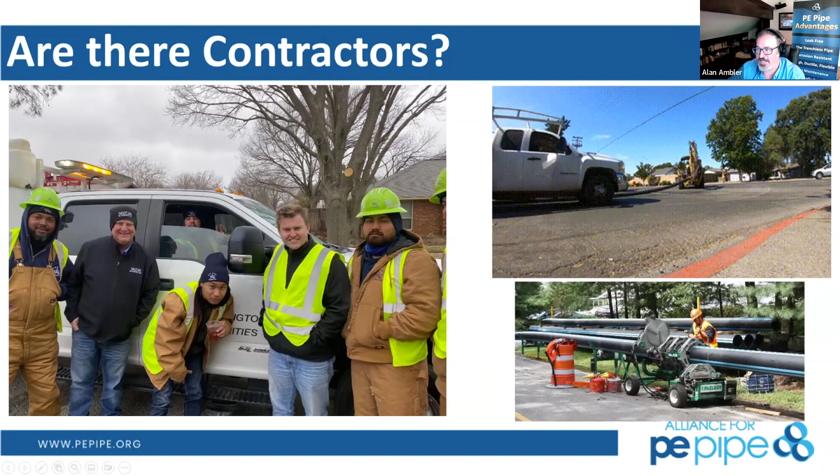So we did talk through quite a bit of this answering Dan's question previously, just some more photographs and animated GIFs of contractors out there doing the work. There are people out there doing it, and they do know about productivity tools. Oftentimes when we discover polyethylene and how productive we can be using it, we'll breeze right through this process and go straight to productivity and putting in pipe.

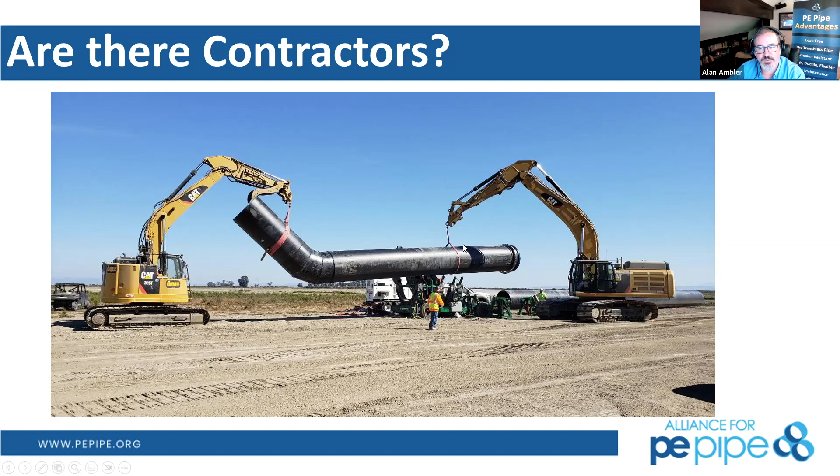So Steve's company can also fabricate fittings for you. If you know you need a special fitting, or a special bend radius, they will put it together in their field, in their yard for you, and get it to your site. So here's another video.

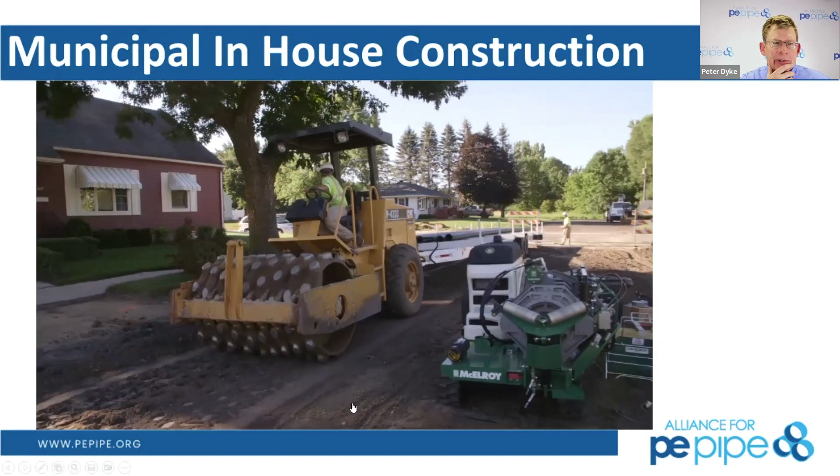Municipal in-house construction. Pete, I think you're talking over this one. Yeah, that video we shot up in Austin, Minnesota, Alan, and we're just showing this utility south of Minneapolis has incorporated their own staff. Since they've been using poly so long, they're not fixing as much pipe anymore, so they just take those same guys, kind of like the Maytag repairman thing, and they've taught them how to install polyethylene.

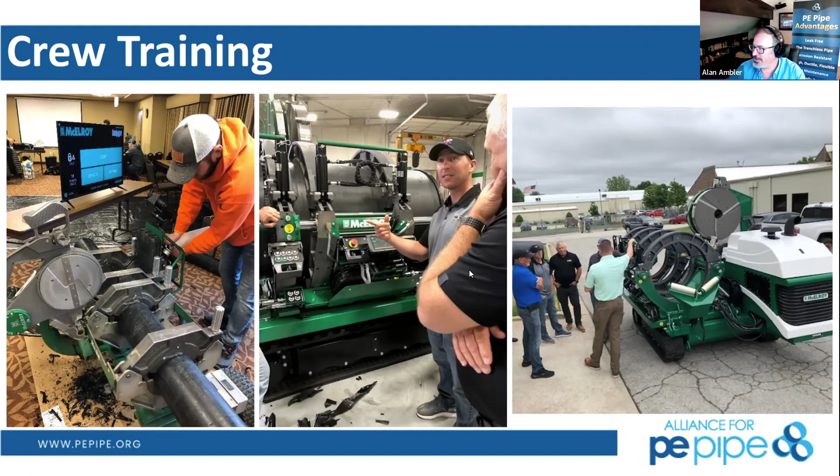Easy enough. Crew training, we're doing it right now, all the time, and so does Steve's crew. As you embark upon your polyethylene journey, we will come to you or tell you where we're going to be able to have that training and make it happen for you. It happens on all levels, all different sizes of pipe. We'll be more than happy to bring equipment to your location or tell you exactly where we're going to be to do that.

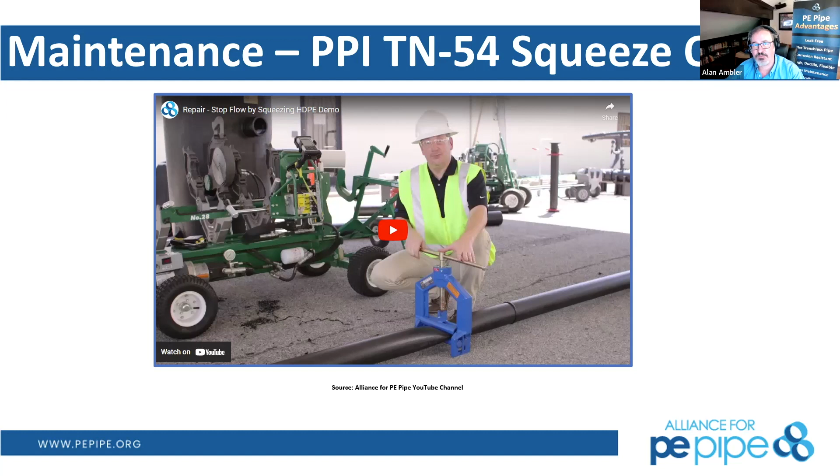So here's a unique thing from the gas industry as it comes over: you can squeeze this pipe off. During the middle of the night in gas main repair, they would simply squeeze that pipe off in locations, perform the repair, and then relieve or open up that pipe. Now there are controls as to how quickly you could go down and then come back up for that pipe to be considered exactly as it was before. It does not damage the pipe if we squeeze it down within that control limit. If you happen to be in a hurry and you do it faster and damage the pipe, you're probably not going to permanently damage it - we just put a repair clamp on it or come back and fix that at a later date.

So here's what it tells you for a 16-inch DR11 pipe: it'll take 6.5 minutes to squeeze it down, 12.5 minutes to squeeze it back up, and they've got plenty of guidance for you on that. That MAB board that Stephen mentioned also has repair options, and they'll walk you through a big key resource here.

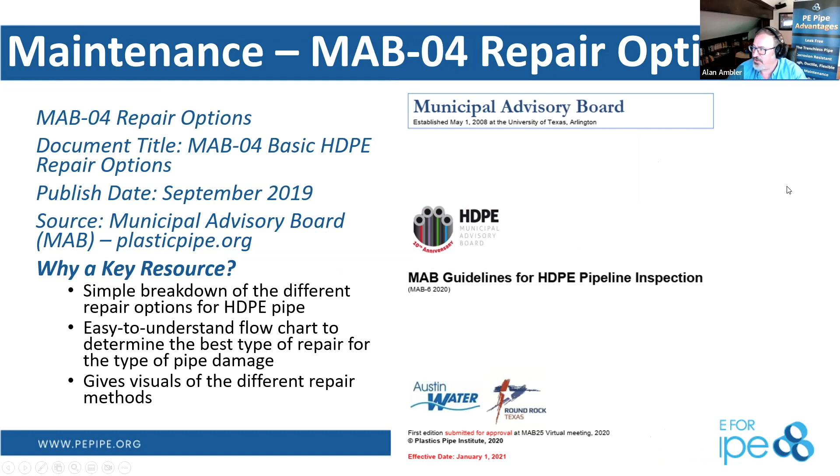You can buy this as a protected book, so that way the crew person can take it in the truck while they're making the repair. It has a decision tree matrix to steer you in the right direction as to what repair to do at what time.

So here's an example of a sidewall fusion itself coming in and doing a new repair for us. We are looking at repair clamps that can be considered permanent now as well - those are more stout, heavy duty repair clamps as we get through that.

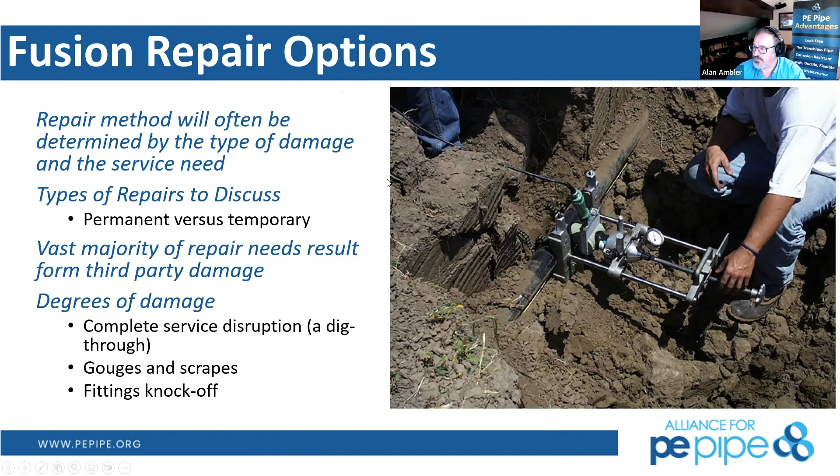Here's some more images of the in-ditch butt fusion that Steve had talked about, and he'll add some more color right now. Yeah, so this is that innovation that McElroy has done over the years to be able to remove those jaws and lower them down safely into the ditch to make a butt fusion. Now again, like I said before, one of the two sides has to be moved to do a butt fusion.

If you go to the next slide, you'll see how you would do a repair when you can't move either side, because when both ends are buried, you can't move the pipe. So that's when you go to electrofusion: properly scrape the pipe, remove whatever third-party damage happened in between those two couplings, replace it with new pipe, and then electrofuse the two joints on either side, because you couldn't move both sides or one side of the pipe.

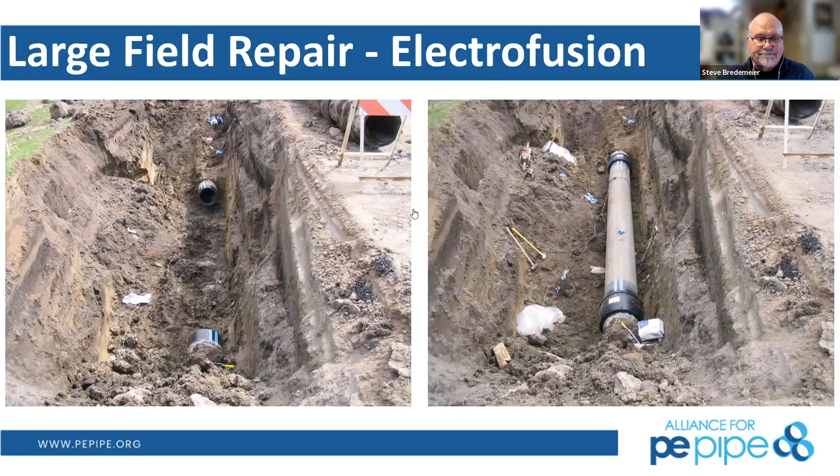It's had a positive impact on our capital pipe program. In some areas we've had multiple breaks, and those areas have now been eliminated. We've reduced our main break rate drastically, our unaccounted for water has dropped drastically, and we find it's been very positive for our bottom line.

It's Richard Brand from East Windsor, New Jersey, Municipal Utility. Our field crews now have been out doing other maintenance projects other than doing emergency main repairs.

So now the final part. Let's go to Austin, Minnesota. Here's a great example, Steve, one of your colleagues, Tom Gannon, up there in Austin. These guys have been doing a lot of their own work.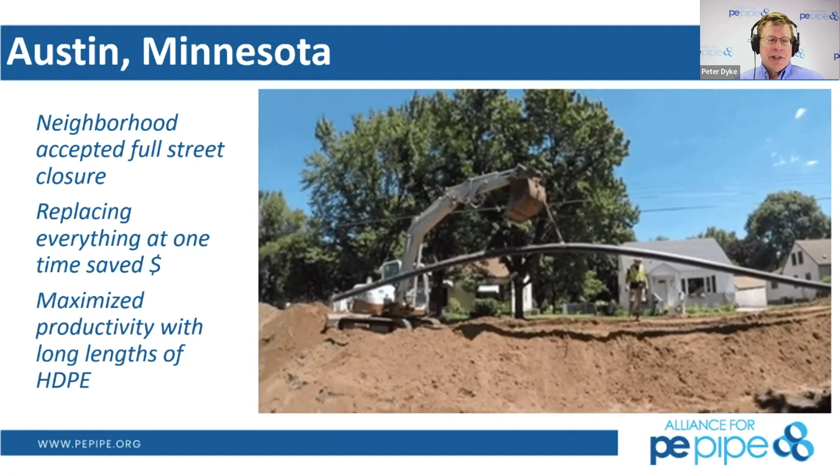Go to the next slide, Alan. So this is that open cut image of putting in a 300-foot piece. What was done yesterday is in the lower right. Now we're putting in another 300-foot piece, and it will be butt fused in the trench. So they do about 300 feet a day for water.

Go ahead, Alan. And then finally, the way they like to connect to the main that they put in is with the sidewall fusion method. That's the third fusion - self-tapping tees using the sidewall method, which is very common in the gas industry. Probably fewer than 10% of utilities do it in water, but it's a great fusion, it works really well. So he did one fusion going off to the west, and the next fusion he's doing will go off to the east. Then he used butt fusion to connect to that service saddle.

The next video we're going to look at is a friend of mine, Josh Van Diver, who's with Redding, California. Think north of Sacramento, not about an hour and a half from Eureka, that just had that earthquake. 20 or 40 foot joints are used that are butt welded for wastewater.

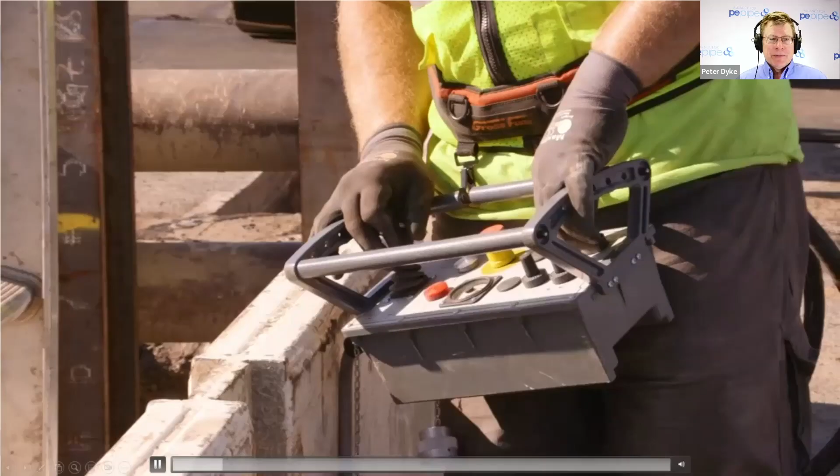To make a seamless pipe, it's like pulling a hose through - you never have to see it again. And coming from a maintenance standpoint, where you have those failure points of joints where roots and I&I can get in, eliminating that eliminates the need to ever have to go back.

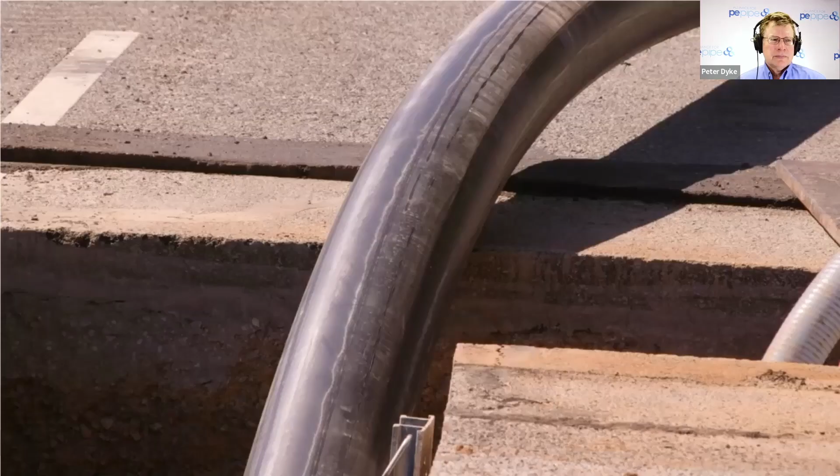The impact that poly has had on our capital plan is huge. We've pretty much changed our entire capital improvement process on the sewer collection side - to replace pipe that needs bigger diameter, if we need more capacity, we burst it. The reason is because we can get away with a lot less open cut, and the cover costs and paving costs and all that. We got introduced to polypipe and the whole bursting process of what you can actually do.

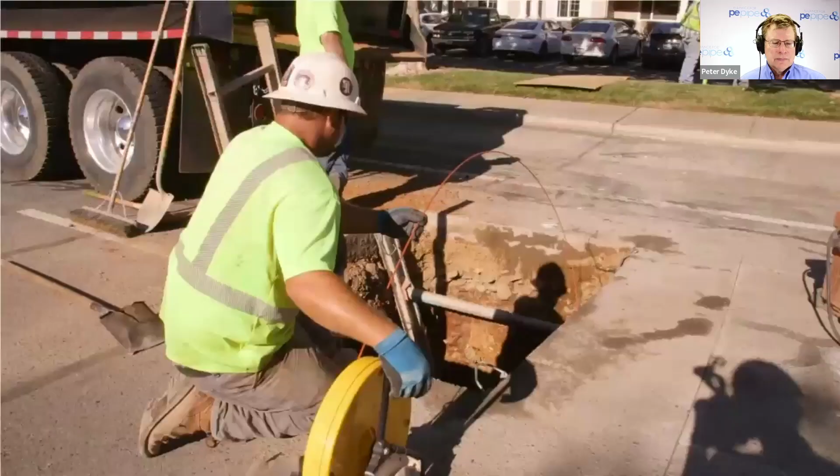I think if more collection systems, water agencies, and municipalities in general could start to look at the newer technologies that are out there, they're going to really be able to get a lot done.

So they use it for AC pipe, putting this in to burst that, and they also use it for clay. Now this engineer I met down in Sunrise, Florida - think Fort Lauderdale - they provide water and wastewater to 7 different cities in the area. He learned something very interesting.

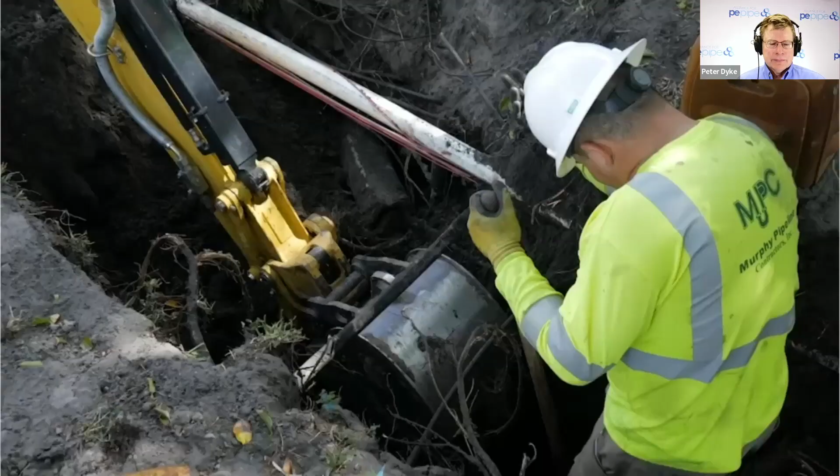We just bid out a project at the Escape Valencia community of the town of Davie here in Broward County, Florida. The project consists of about 40 to 45,000 feet of pipe. Including that in our contract, with an alternate bid for HDPE, we were able to save between $2 and $3 million by making that transition on this project.

So that was a transition from open cut to pipe bursting, and that was the first time they'd done a pipe bursting job, Alan.

Really very exciting. Now, off to Casselberry, Florida, a little bit further north than Sunrise. In Casselberry, we were lucky enough, blessed to be able to get money from the American Recovery and Reinvestment Act. We replaced 35 miles of aging AC pipe via pipe bursting method, basically replacing all that AC pipe within the city limits. We used $10 million in federal grant money, which really helped accelerate that program.

As you can see here with HDPE, the crews really did learn how to take advantage of that viscoelastic behavior and avoid curves and bends or manufactured fittings to accomplish that bend. So that one did use static pipe bursting.

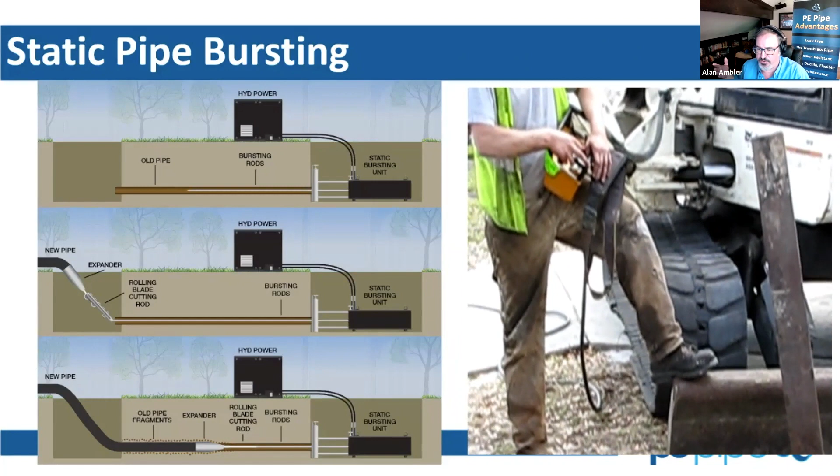Here's just another video of the process itself of pulling back on the pipe. We've pushed that static rod into the pipe, connected to an expander head, and we're pulling back through that process. It's pretty basic as we go through - kind of like watching paint dry after you've seen it enough times, but a very useful method to be able to handle that pipe and replace the existing pipe.

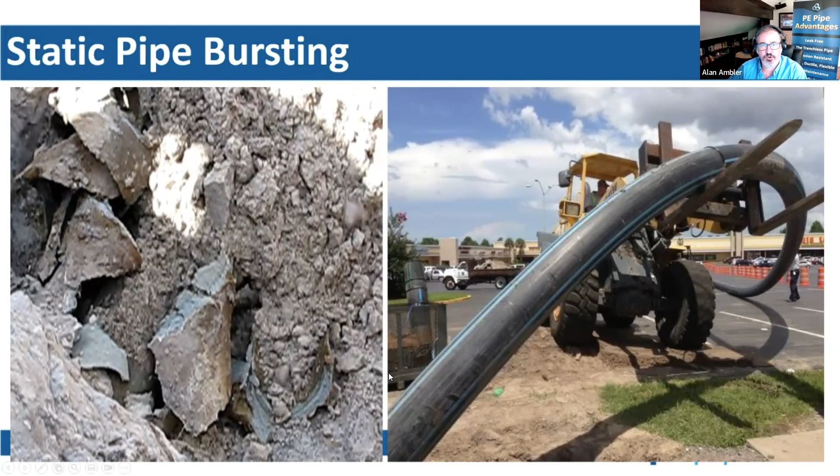So here's another example of pulling a pipe from a laydown yard into place as we're moving that pipeline from the laydown yard to where we were lining up with the expander head and the pipe insertion pit. You're seeing how they take advantage of that durability and ruggedness of high density polyethylene.

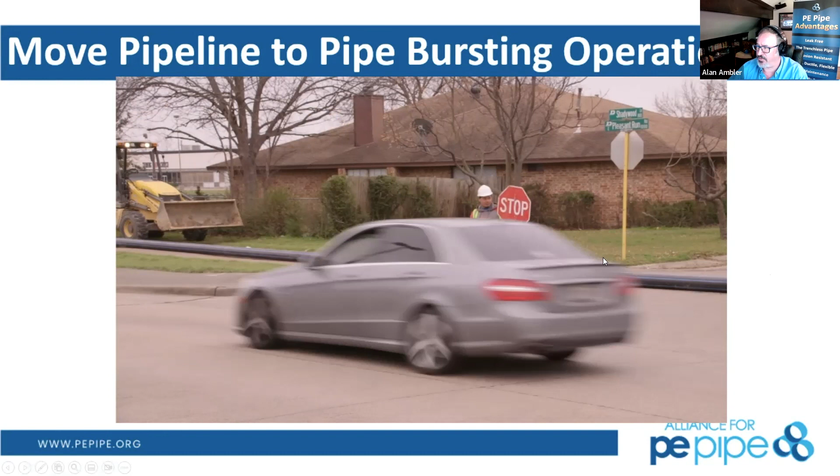Some of the direct success we've had with the Alliance in helping agencies - the Lake Kiowa Special Utility District north of Dallas has bid an AC pipe bursting project and they're starting to embark upon it. We've done seminars with this crew and helped write specifications, and also looked at design as design reviews as that advanced, and they're starting that project.

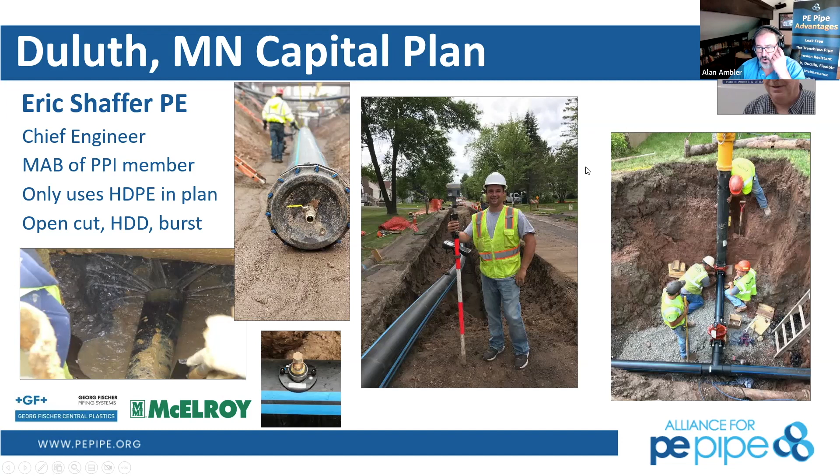Sure, go ahead to the next slide. What's really exciting about Eric Shaffer's work here is he does a water job - water, sewer, both pipe bursting and drilling every year, as well as open cut. And that's where you saw these earlier examples. Eric also serves on the Municipal Advisory Board at the Plastics Pipe Institute. Let's hear what he had to say on one of my podcasts.

What were some of the issues the city was seeing in its conveyance of water from A to B? Big things are corrosion and leaks. Over time, a number of leaks and water main breaks we had each year just kept spiraling up and up. We defined a leak as water coming out of the pipe that we can fix anytime we get to it, where a break is something we call an emergency and fix it right now. But we got as high as about 160 leaks and 160 breaks, or a total of 320 holes in the ground in one year.

Now we're trending back down finally. But that's because we've gone out and focused on the worst neighborhoods. We've pulled out the cast iron and the ductile iron and stuck in polyethylene, and we just don't have the failures anymore. So you used to see at most 320 a year - what are you looking at now on an annual basis? Last year we had 127 leaks and breaks combined. Wow, so you've cut it to a third. We cut it to a third, but some of that's affected by temperature, I can't take all the credit. But you had some breaks - were they in polyethylene or traditional materials? Traditional materials. Yeah, we don't have breaks in polyethylene.

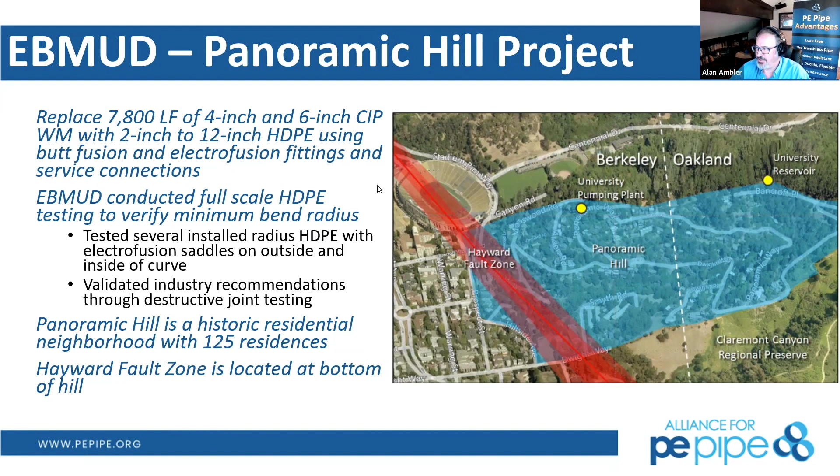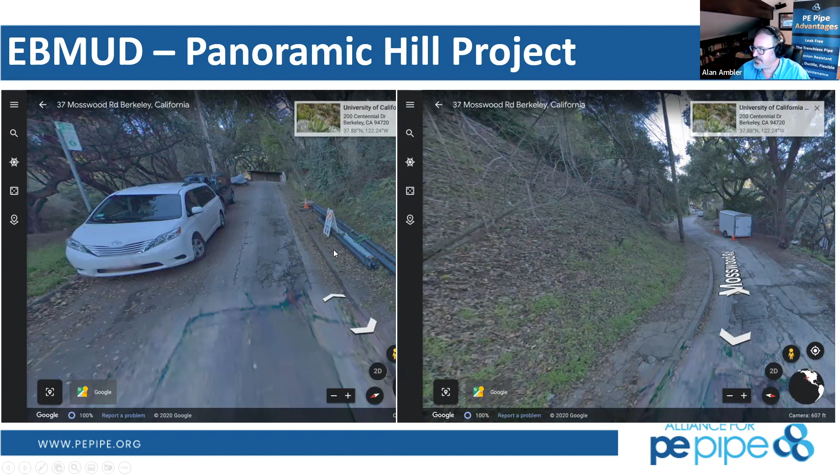The EBMUD has adopted polyethylene projects. This is a primary example of how to take advantage of that allowable bending radius and use it to get polyethylene where you need it. This is a fault zone, an area with seismic activity, an older neighborhood where the switchbacks were pretty severe. As you can see, they flew polyethylene by helicopter right to the job site. Site constraints were fairly severe, requiring them to install this high density polyethylene, and the project was a resounding success.